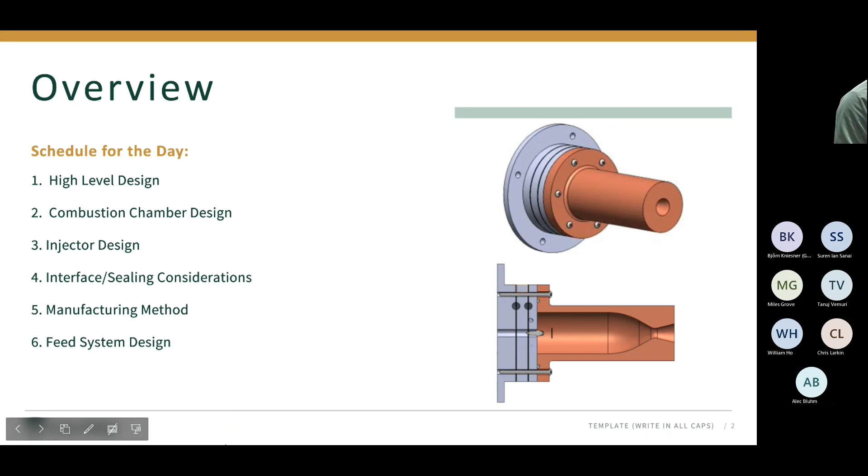All right, so here's just our schedule. We're going to go through some high-level design, then get into the combustion chamber, the injector, the interface between the two, some high-level manufacturing methods, and feed system design.

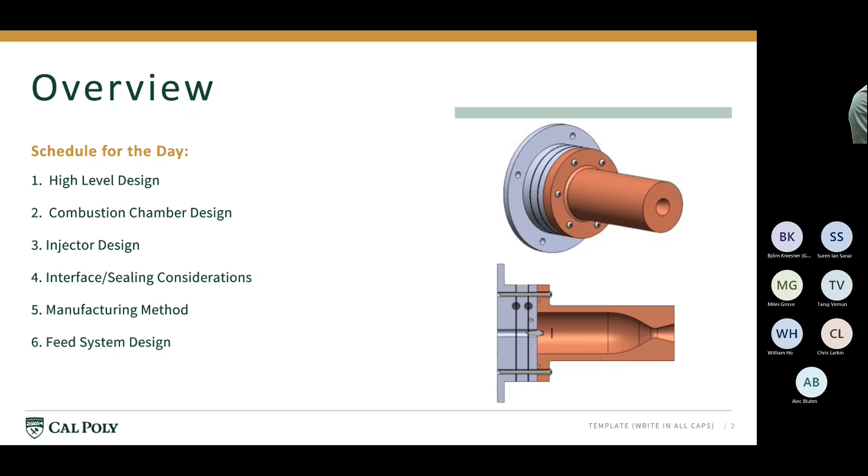And up there you can see just some pictures of what we have so far.

High-level design: we decided to do an ethanol and nitrous mixture, 90% ethanol, and we're able to dope that down if we have any more thermal problems. Mixture ratio of 1.5, thrust of 25 pounds, a chamber pressure of about 10 bar, no cooling method this time, and a pressure fed system. The goal is to be able to integrate with the test stand and to scale this project up. A lot of these constraints are from either the department or from conservative metrics that we've developed, so the goal is to make it bigger and flight ready as time progresses. A lot of these are very light goals.

The system—just to be on the same page, not a flight engine yet. No, definitely not a flight engine.

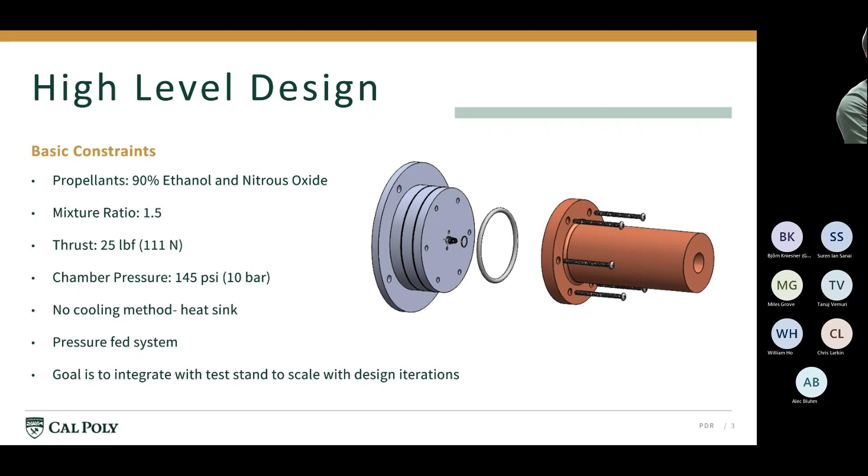This is getting a little bit more into the combustion chamber design. We first used CEA to calculate things like gamma, the combustion temperature, and the molar mass, shown here. Then we used RPA to size the combustion chamber. We went through our own calcs to make sure everything checked out, and it did match RPA's calculations. We'll get more into the specifics of the nozzle and combustion chamber in the next few slides, but this is our process.

We designed the nozzle for ideal expansion at sea level. Question: is the idea that this remains always just a test cell unit that you can scale up, or would you eventually want to fly something like this? I don't think we would want to fly the heat sink. At this point, no.

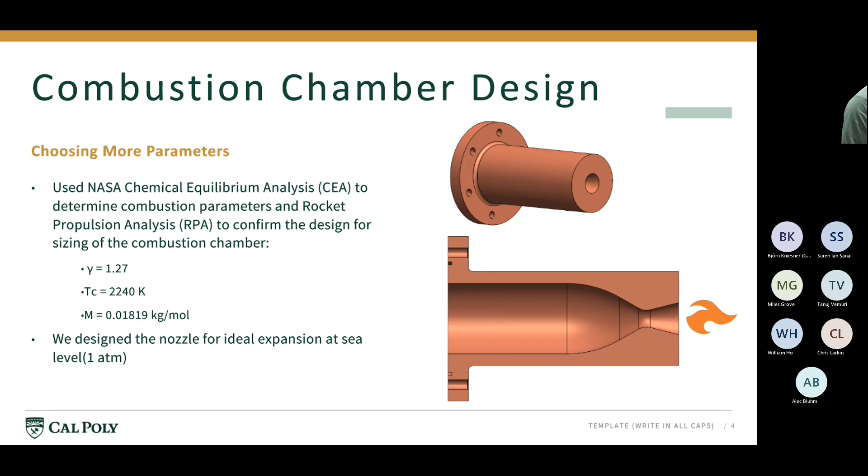All right, this is on the nozzle design. There are some rocket equations we used to get parameters here, like the exit velocity, the coefficient of thrust, and specific impulse. Not the best specific impulse, but again we're not going for perfect efficiency here—we're just going for something that doesn't get too hot.

Wait, I'm confused because your exit velocity and your ISP tell two different stories. Exit velocity being out of the nozzle, right? Yeah, not your C star. No, not the C star. Because your exhaust velocity should scale with ISP through G. But if I take 2124 and divide by 9.81, I get 216 seconds. Interesting.

Is the ISP from RPA? I don't think so, I've got my code right here. There was a little bit of crossover between RPA and my actual code, but I thought I ironed everything out—it might be. I would double check that number. Whoever's taking notes, take it as an action item to double check ISP, because 109 seconds seems really low for a liquid—you can get 70 seconds with cold gas thrusters. I would double check the ISP number, because if you're getting 2124 meters per second exit velocity, you should be getting like 200 seconds of ISP. Yeah, I'll double check it. Maybe it is more, I'll look into it. It should be an easy fix, but cool.

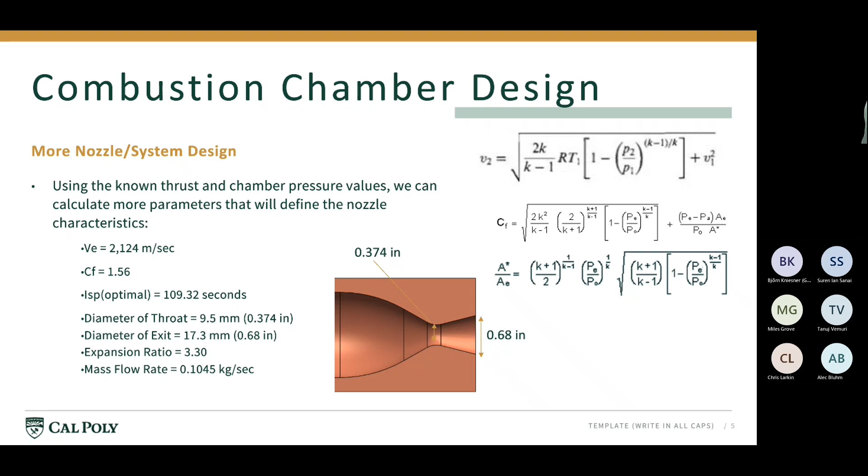And this was the chamber sizing stuff. The RPA sizing outputs—we were a little skeptical because the contraction ratio was so high, like 15 or 17 that it was first outputting. That's like 3 or 4 times what I was expecting.

But then going into Huzel and Huang, it showed a couple of graphs that essentially plotted experimental liquid propulsion systems. These aren't the same pressures we're experiencing, but if you look at the graphs, our throat diameter, around 0.37, shows contraction ratios that have been really high for successful systems. So we went through the sizing again and assumed that was okay, and then we chose the chamber length also based off of graphs like these in Huzel and Huang.

Can you talk a little about what contraction ratio is and why that number was originally suspicious for you? Contraction ratio, for those who don't know, is the area of the combustion chamber to the area of the throat.

I haven't sized something like this before, but when we were going through the calcs, I was expecting something between 3 to 5-ish, based off things I've heard of other people's engines. But because our throat diameter is so small, it made sense that RPA was outputting things we weren't expecting, and that the calcs I was doing were consistent with what we were finding across other thrusters of this size.

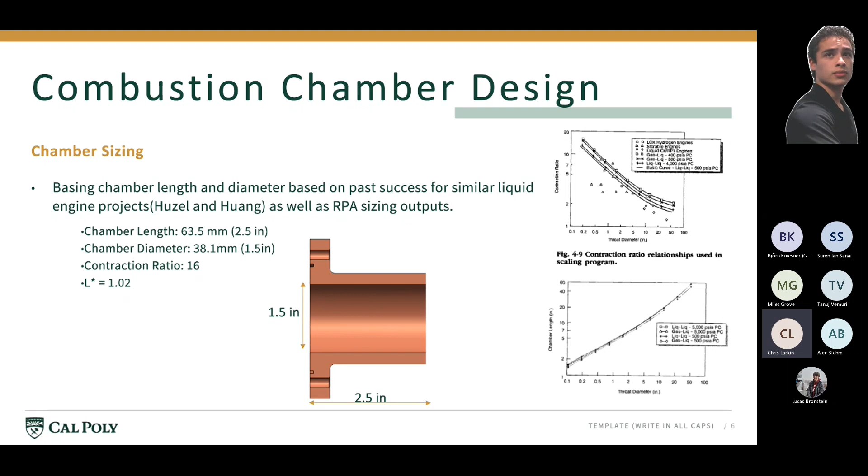And then did you guys look into how much heat you're actually going to be dumping into the chamber? Like I see thermal conductivity, but do we know how much heat it can take before it becomes a problem?

Yeah, so I'll refer that question to Adam here. Yeah, we did. Jake's about to get into that right now with the thickness of the material. So I think he's next.

Are you guys going to touch on how much heat's being dumped in at the throat specifically if you're going to use a copper chamber? Yeah, I don't think we go into the throat specifically right now. I think that's something that we need to look at for PDR or CDR. Yeah, but you'll probably melt the copper without any kind of cooling.

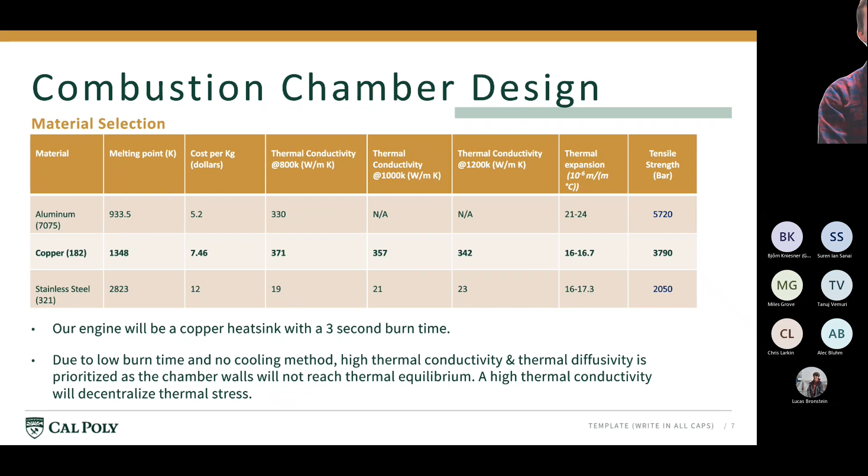Okay, hi everyone, I'm Jake. Where's the actual slides? Does the arrow just work? The one, the arrow on the keyboard.

Yeah, okay. Anyway, so in terms of analyzing the heat transfer, that was most of what we did for determining the wall thickness, because with our chamber pressure being as low as it is, our actual mechanical stresses in the chamber walls were far below the yield stress of the copper we were looking at. And so ultimately, because we're doing the heat sink method, we needed to know how much heat we could transfer in without losing the structural integrity of our combustion chamber.

In order to do that, it's kind of a complicated problem, but it was difficult to find heat transfer coefficients for the convection between the hot gases and the chamber walls. And since that's an overwhelming majority of how the heat is transferred into the walls, we had to figure that out. There was a method in the book by Huzel and Huang for estimating the convective heat transfer coefficient, which came out to be about 0.002 BTU per inch squared second degree Fahrenheit, which is a fun unit.

Anyway, using that, I calculated pretty much the worst case heat transfer across the entire thing, as if it were never really changing temperature and not dumping any heat, because our burn time is so low, and basically just did an estimate of how much copper volume we would need in order to withstand the heat, on a specific heat basis. Ultimately, this doesn't help us determine where the hot spots and things like that are, and that would be really difficult to do.

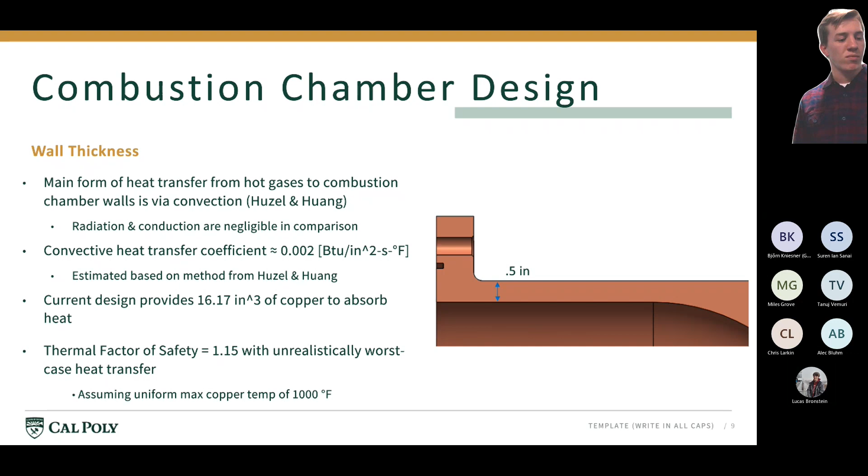Yeah, but going to the previous slide, I think you're sizing your wall thickness based on chamber pressure and some material strength, and then are you applying a factor of safety on that, or are you just assuming PR over T?

Oh, so based on the math we did, I use a factor of safety too, when I was doing a lot of the stuff later in the interface, which is really high. Okay, I'm sorry, did you hear that? Yeah, it sounds like you're using factor of safety too. Adam said he used factor of safety too for other stuff.

The reason I didn't include that on this is because the yield strength of the copper we were looking at was so much higher than this; it was a very loose estimate on what the mechanical stress is. This was based on just a thick wall — actually I think a thin wall cylinder, as a pressure vessel, which isn't perfect, but it gave us a ballpark estimate, and it's just so much lower than the yield stress of copper that it didn't bother us.

A quick note on this slide: you have the different strengths of things with respect to temperature and percentage of their initial strength, but I don't see the initial strength of copper noted. Oh, it's the brown line there, I didn't write it out. It was more for reference in terms of what the relationship looks like.

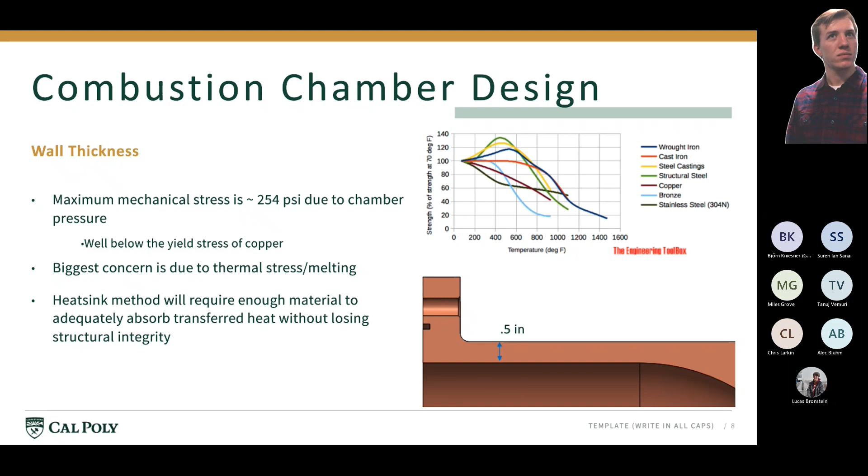I guess just to support what Alec said prior, if you're going to treat this as a lab unit, increase your wall thickness — it doesn't hurt you any. That way you can at least get more fires out of it. You never have to worry about, in the second fire, going back and reassessing your current wall thickness versus what it actually should be. It's just easier. Gotcha, okay.

All right, next we got injector design.

How do you move the slide forward? I just want to know. It's just the arrow keys.

Hello, I'm Aiden. I've been the leader of the injector team. The injector is the most complicated geometrical part of the rocket engine, so we've been working on the design for a while. There are high-level design decisions you need to make before you actually get into creating geometry, so we're going to go through those first.

The first thing you need to decide is your mixture ratio. The mixture ratio is the ratio of the mass flow rate of the oxidizer to the mass flow rate of fuel. For our engine, we're using a mixture ratio of 1.5. The reason we picked that relates to our use of the softwares RPA and NASA CEA.

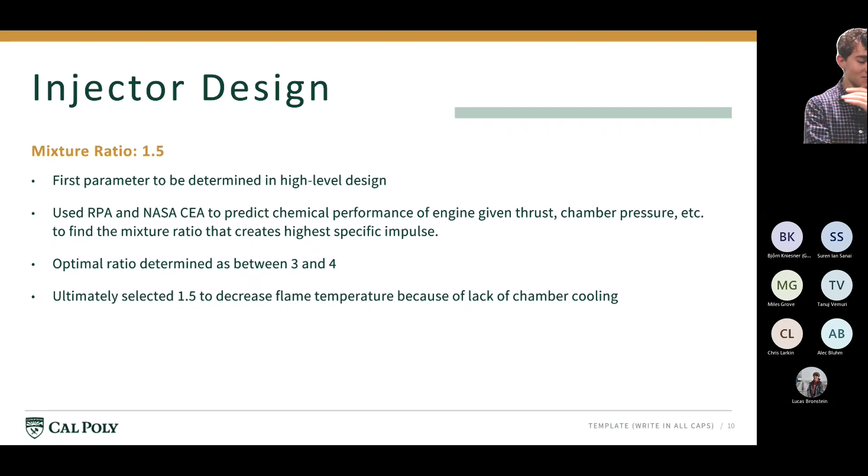I guess it's between 4 and 5, not 3 and 4. This might have been different. It's fine, for reference I'll just give it to you. Sorry, okay, I'll move on.

The big decision you have to go through regarding injector design is the element type. There are a lot of different ways to design an injector, and that main decision of injector type governs everything else.

The most common type of injector and the most well documented is the impinging jet injector, where you have channels through which your oxidizer and fuel will flow, and they exit the injector faceplate and hit each other. The two streams hit each other at an angle, creating atomization, which is best for combustion, so you'll be able to ignite easier.

This is a tried and true design that has been around since the very beginning of rocket engine design. Initial estimations of the injector orifice area indicated that with our hole size, we only needed one element, and that element would be placed in the center of the injector faceplate.

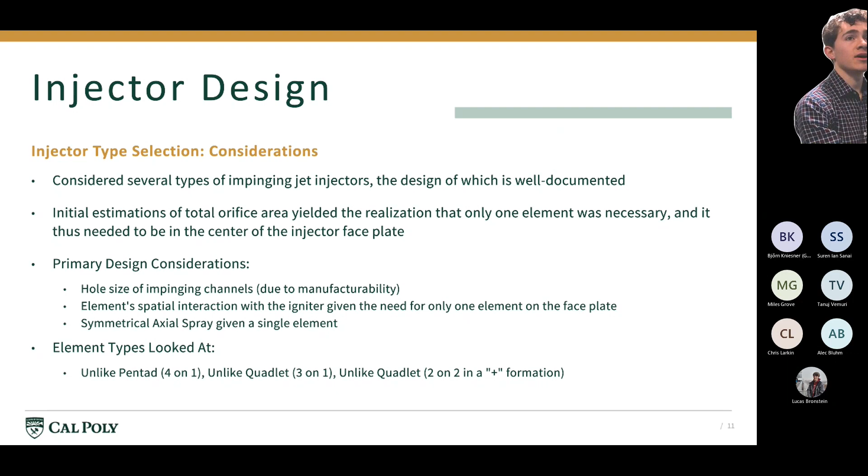So as for what we actually ended up picking, we picked the 2-on-2, the plus configuration. The main reason was igniter placement, because with that design, it allows us to place the igniter squarely in the center of the injector plate, with 4 holes surrounding the igniter hole where the propellant will exit. It's easier to integrate the igniter into the injector than into the combustion chamber, so we just decided to go with that route.

In addition, the hole size is different versus the 4-on-1 and the 3-on-1. The 2-on-2 increases the minimum hole size you need to drill, because with the 4-on-1 and 3-on-1, you'll have small holes on the outside and a larger hole in the center, but with the 2-on-2, they're more balanced.

Got it. And so for the final high-level design decisions, you have to decide on your areas for the orifices. You have to decide on the angle at which they're going to impinge, and you have to decide on the distance that the propellant will travel before it hits the impingement point. So impingement distance is like a straight line distance.

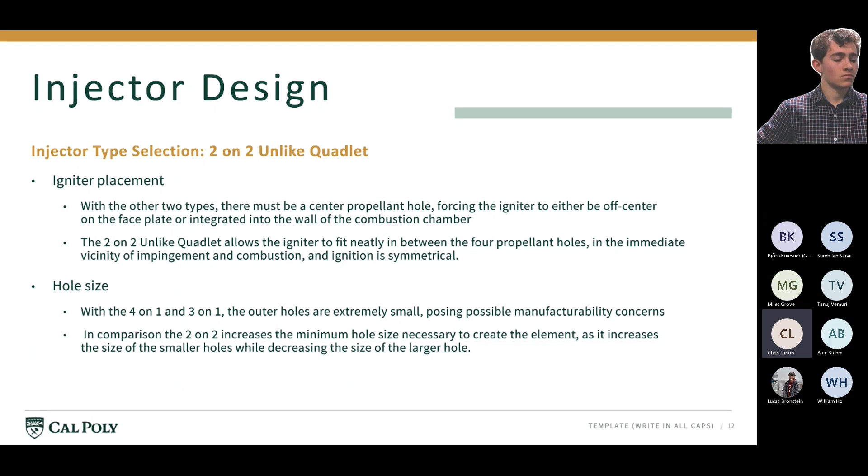You mentioned this in the previous slide — wait, sorry, can you go back one? Yeah. All right, never mind — if you're going with the 2-on-2 plus, my point's irrelevant. Disregard. Okay.

Over to Alex. We selected stainless steel for our material. Nitrous has corrosive properties, so we didn't want to corrode our injector. It also has a similar thermal expansion rate to copper, and it's also cheaper than copper. The main disadvantage to stainless steel is that it's pretty hard to manufacture.

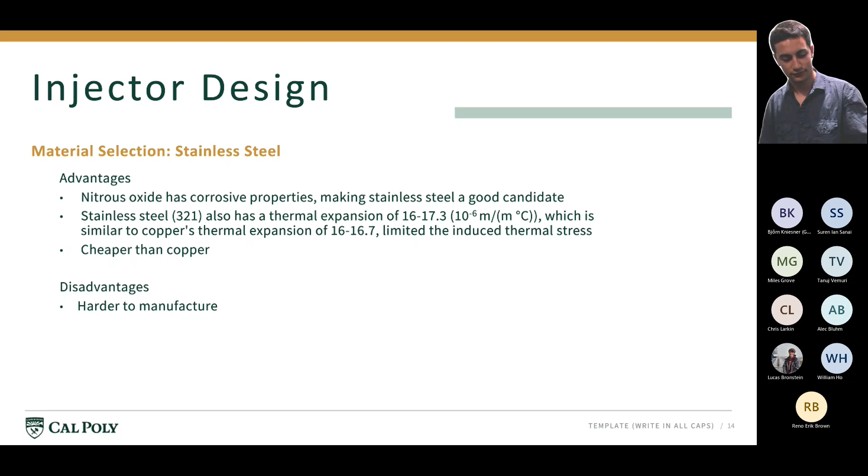So with impinging injectors, a very tried and true design method is the stacked plate approach. Essentially this means you need to route your propellant from one inlet to potentially multiple outlets, and therefore you need to distribute each propellant through a manifold. One of the easiest ways to create that manifold is by using separate plates, where each plate has half of the channel manufactured, and then two plates with mirrored channels are put together to form a full channel that the propellant can travel through.

So this comes to the big crux of where we are right now. We, as the injector team, do not have a single injector design selected. However, we have several candidates, and we have two specific trades that we are in the process of making, and we'd like your advice as to which would be best to proceed with. The two trades are: using 2 plates versus 3 plates to create the injector, and the way in which the propellant will enter the injector from the feed system. I'll get into that.

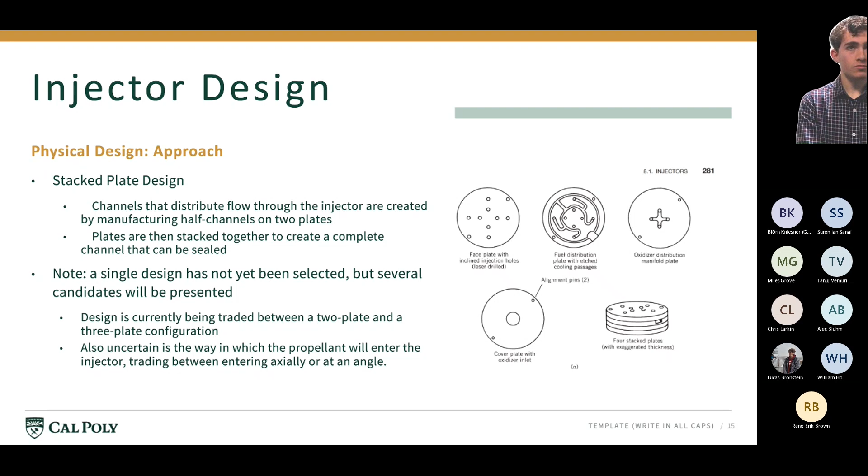All right, so I was talking about the trades that we were going to make, and I'm going to explain one of them. The other will be explained within the actual designs that we show. We're going to show two designs. One design we're sort of leaning towards, and that's the design in the assembly you've already seen with the actual combustion chamber. But for right now, we're considering two options.

What material is the gasket? Graphite. Wait, this is like, it's not pure graphite, right? It's like a graphite mesh thing. I feel like you guys have used this previously. Yes, I'm not exactly sure what the exact material is, but I know the gasket material used in the prop lab is graphite, so that's mostly what we were basing this off of.

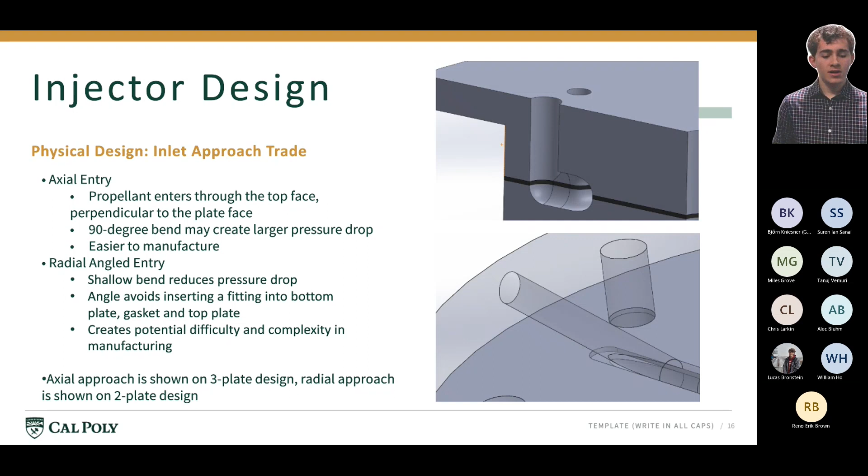Yeah, I think that was all I wanted to talk about here. So I will hand it off to Alex, and we will talk about the 2 plate design. Okay, this is our 2 plate design.

I'm just going to move on to the advantages and disadvantages. If you guys have questions, we can go back to the images. The strengths of this design, theoretically, is reliability. There's only one gasket instead of multiple, and there's fewer parts in general.

The main disadvantages of this design are small wall thicknesses, and we can go back to the images to look at those - they are unavoidable, unfortunately. The geometry necessitates a channel being routed between the igniter hole and the orifice holes, which makes things complicated. We have to use small channels; in the 2 plate we're using 1/8 inch channels, and that brings up problems with the feed system.

It's hard to implement with our current feed system because we have an area restriction from the 1/4 inch pipes in the feed system, which leads to a pressure drop, and that makes things hard to predict.

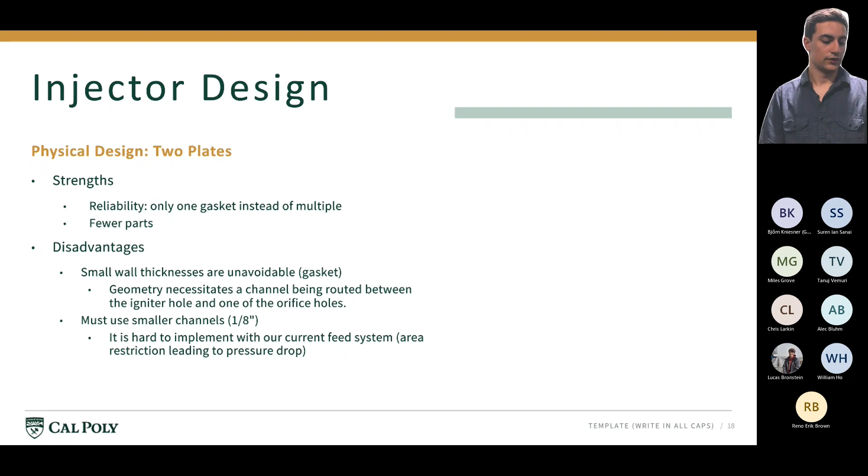Yeah, go back. It's hard to see, but if you look at the transparent view, slightly to the right of the igniter hole, right past one of the orifice holes, there's a channel moving very close to that hole. That distance is very, very small, dangerously small. And there's another one right to the left of the igniter hole as well.

So right here, and then yes, you can see that right here and right here. Although we can change this - it can get larger. That's the main problem with this.

You do have a small wall thickness there, but during operation your pressure differential across that should be fairly small, assuming similar pressure between the ox and fuel side. Right, you have a small wall thickness, but you'll have high manifold pressure on both ox and fuel side that cancel each other out, where your net stress is essentially putting it into compression.

Yeah, but they're still going to feel that high differential during fill though. Right, it's during your startup transient, I think, where you would maybe get bit - when they only have nitrous in the system and they're still putting fuel in, or vice versa.

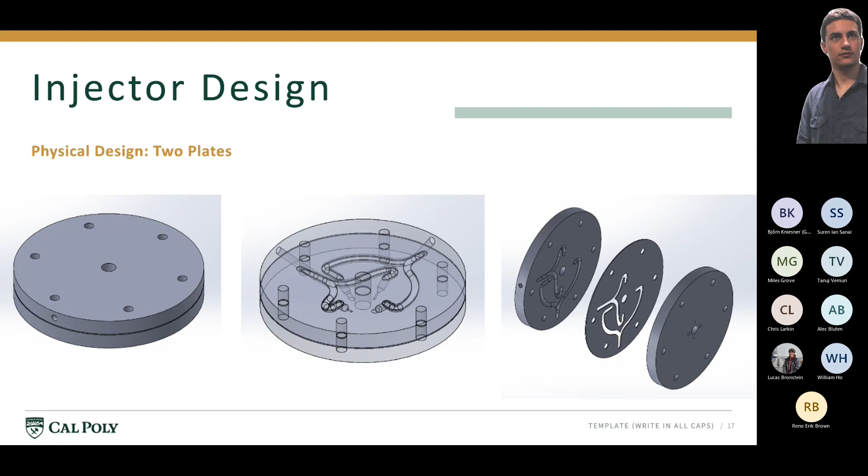So we're going to move on to the 3-plate design. Why is it not working? I thought it was just the arrow key. I'm just clicking that. Okay, whatever.

All right, and then the second design that we were considering was a 3-plate design. It's a little bit hard to see what's going on in the picture, but essentially the channels for the oxidizer are sandwiched between the top 2 plates, and the channels for the fuel are sandwiched between the bottom 2 plates. We can head back to this slide if you guys have any questions.

The main strengths of the 3-plate design are that it allows for larger channels, a quarter inch in diameter, because the channels are spread across 2 different planes instead of just one. This also allows for greater wall thicknesses. A disadvantage is that it requires 2 gaskets, which is theoretically more points of failure. And also, manufacturability is harder.

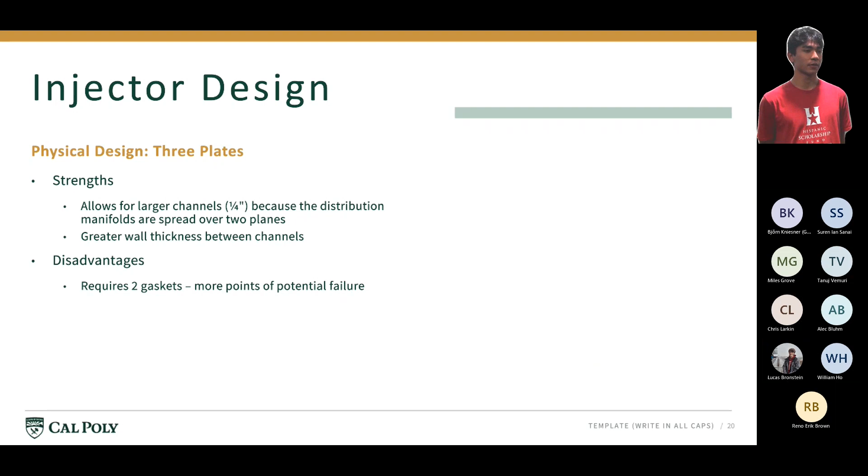Can you go back to the previous one? I think one benefit as well is that it makes it so you don't have the same crossing manifolds, right? Yeah, like for the single or the 2-plate design, you have to weave both oxidizer and fuel in between each other, like Miles was talking about. Whereas if you go to the 3-plate design, you don't have that, because they're on separate levels. Yeah, exactly, you should just be able to go straight line with that. Then you don't need to do the pairing like you guys have.

I don't know how I'm going to be able to say this effectively. For the middle plate and the middle-to-combustion-side gasket, you have the injector hole through the middle, and then you have 2 holes on either side. What are those for? Those holes are for the other propellant. The other propellant is traveling through those holes after having been routed in the first gasket. Oh, just kidding. Yeah, I'm silly. Sorry.

Copy. And then it's just a supply hole for the opposite gasket on the top left hand side. That's just a supply hole for the bottom. Exactly, yes. So the oxidizer is routed down to the first 2 plates, and then it's split off and routed down to the orifice holes, and then the fuel is routed down to the second 2 plates and split off there.

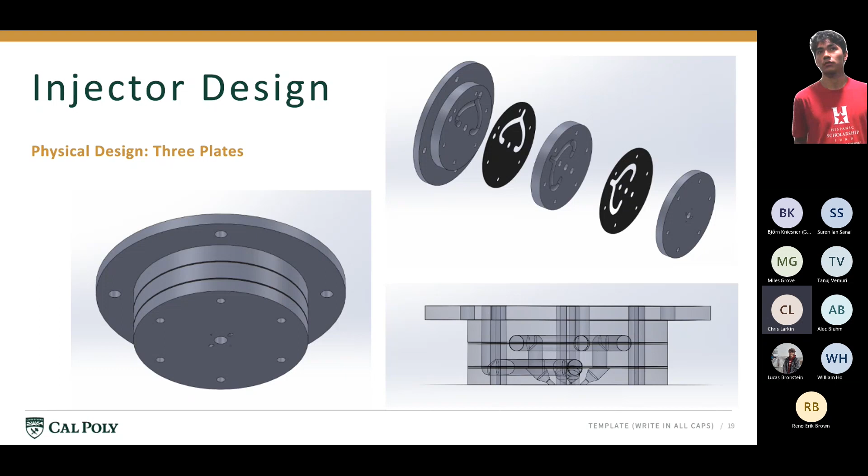Right, but are those not through holes all the way through all 5 parts there? Or do you have a blind hole in the top? Oh yeah, so the CAD has through holes, but Adam did his calculations based on a tap joint. So we're probably going to change the CAD so the bolts will tap out and end within the top plate.

Copy. Regardless of calculations for the joint, I think that would be a win in terms of making sure you don't leak and blow a bunch of fire back at your feed system as well. That makes sense, yeah, it's just something I forgot to change in the CAD.

Wait, I don't really understand that. Why do you want to put threads into the stainless steel instead of just putting a nut on the back face? If you have a through hole through this stack, Miles, you'll have a leak path from the combustion chamber to the head end.

Are all the bolts external? Yeah, all these bolts are external. But even though they're external holes, there's still a path through the gasket. Oh, I see. The thing is you could still get fire playing directly back in your feed system if the gasket bursts.

Gotcha. Because there is an O-ring in between, on the bottom face of the bottom plate, there is an O-ring between the combustion chamber and the 6 holes, just inside the combustion chamber flange. Well, we have a whole interface slide later, and we will address that.

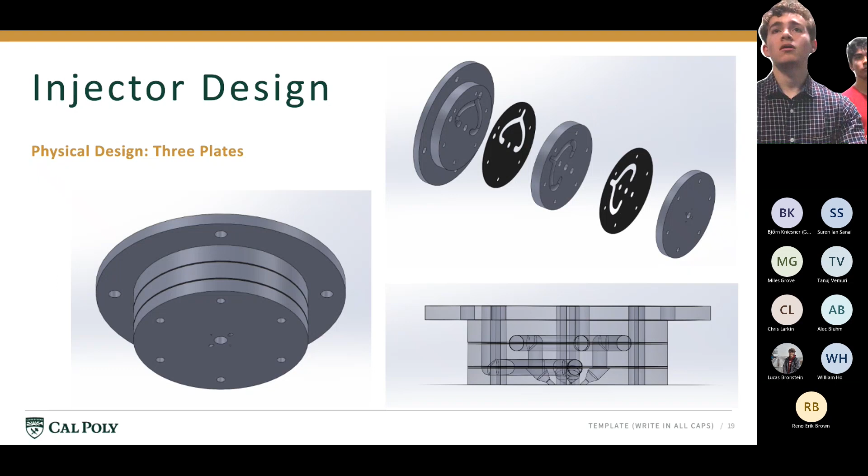Yep, okay, I think we can move on now, and we will talk about the igniter.

Wait, sorry, I think one of the things you guys were trying to take away from the PDR was getting advice on 2 or 3 plate, right? Yeah, that I did. I don't know that we really settled on either. I think we've given them a lot to think about.

Well, we settled one trade, which was the entry, and just for ease of manufacturability, we'll do the axial entry. Yeah, I think that's applicable to both, right? Yes, that is applicable to both.

But yeah, what are your gut feelings about 2-plate or 3-plate? I don't know, man, I feel like if you guys can figure out a way to make 2-plate safe, it's probably easier. Yeah, from the manufacturing standpoint, 2 plates is just superior because you have so much less concern about alignment.

So are you guys gonna go over this later? Maybe you will. But who is gonna make this and where? It's a great point, we have a little bit about that later.

Okay, and then one last note on the 2-plate design: I think the only thing you'd really have to worry about is your minimum material condition for manufacturing. If you get too thin, you're going to experience some super thin walls, so make sure to take that into account and double check it when you're actually manufacturing if you go down that route.

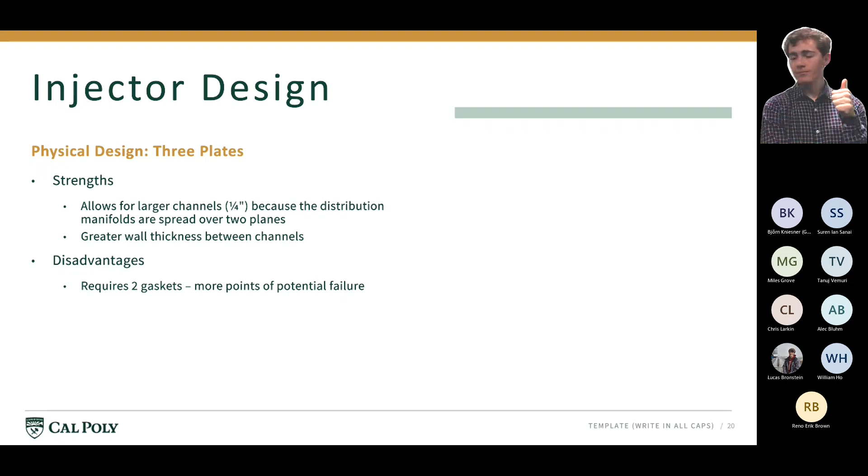Okay, so when we were talking about igniters, we went through 4 main choices: a spark plug, a nichrome sparkler, a hydrogen burn-off igniter, and a piezoelectric lighter. We ended up settling on the spark plug as the best option, mostly because of its size. We found the smallest one to be about 0.23 inches, and like they talked about earlier, it has to fit in between the orifices, so that was honestly the main deciding factor.

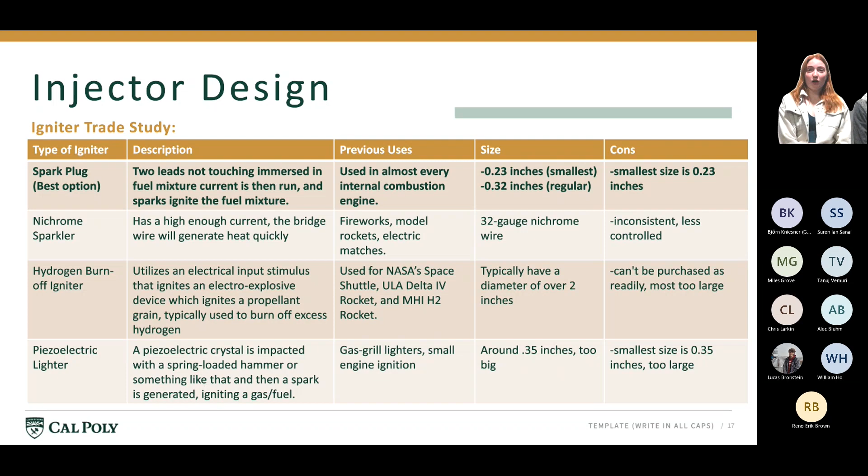The nichrome sparkler we didn't go with because it's inconsistent and less controlled compared to the spark plug, although it would have fit as well. With the hydrogen burn-off igniter, they typically have diameters of over 2 inches, so that just would not have worked with our design. Same thing with the piezoelectric lighter - it was about 0.35 inches, so also too big.

Wait, sorry, can you go back one? For the hydrogen burn-off igniter, I think that's for burning off the excess hydrogen, during the startup sequence, right? It's not used for actually lighting the engine - that was more of an example. Like SSME and RS-25 use an augmented spark igniter, so I guess that's more industry use for the thing that you guys are leaning towards.

But did you guys look at augmented spark igniters? So instead of just using a spark plug, you have flow specifically for your igniter, so that you create a little torch essentially. I've looked at augmented igniters, yeah, I looked into that a little bit - they seem pretty hard to build.

Yeah, so I don't disagree with that. The problem is if you run just a spark plug instead of an ASI, I don't think you guys are going to be able to reliably spark without hard starting. Because you need flow onto your spark gap in order to reliably ignite, right? During your startup transient, if you just dump fuel and ox into your manifolds, you have to wait for them to go back up to your spark, and then it'll light - but at that point you've already dumped a bunch of prop into your combustion chamber, and so you create a bomb.

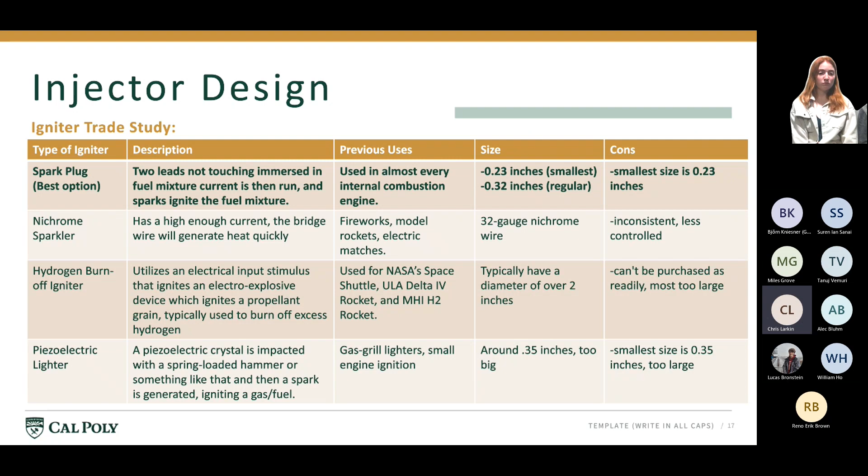So if we do use a spark plug, we found rimfire spark plugs, which are available for purchase, and they fit between our 4 propellant orifices. The pressure and temperature ratings have been verified through our existing Cal Poly bi-prop lab, which does use spark plugs. That says 6 millimeters, but that's roughly 0.23 inches and will fit in our design.

I would talk to Cody about his experience using that spark plug because I think he hates it. In my memory, he hates it. Yeah, those spark plugs for the one in lab also have to be modified to arc to the wall, if I remember correctly, so Cody has to go in and cut the tab off. Yeah, that sounds about right, and I think that's part of the reason he hates it.

Sorry, just one comment on the design process here: this should not be the interface between the injector and the chamber handled like this. You guys are two separate groups working with each other. This should not be the injector team passing you a hard requirement and then you guys having to abide by it. If you guys can get a significantly better spark plug that requires moving injector holes, that's something that should be in the trade space. Maybe you don't end up going with that, but it's not something where they should just say 'I 100% need this' and have it taken as gospel truth. There should be a back and forth between y'all. You are both equally contributing members to the team, so it shouldn't just be one team passing requirements one way without consideration for their downstream effects.

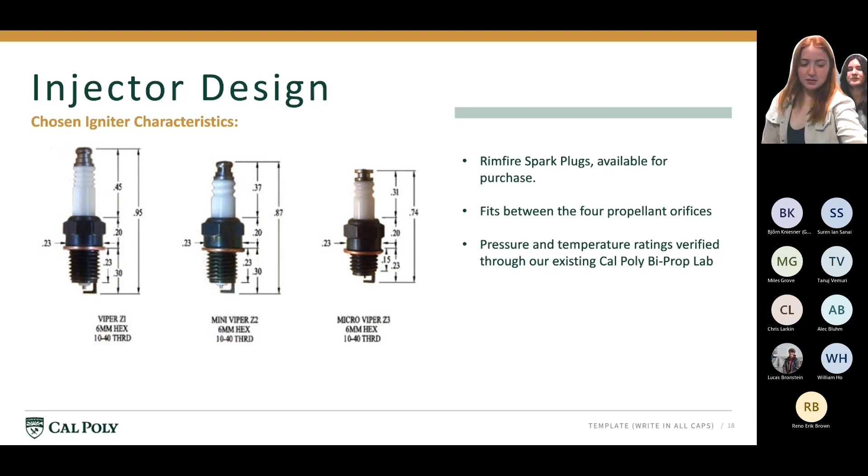Okay, sorry, one last thing. How would you be sparking the spark plugs? You need a high voltage source that's oscillating at some frequency typically. One thing that I've done is buy power supplies for neon signs or whatever and hook that up. But something to keep in mind is that you can't just throw a spark plug in there, you do need to apply a voltage across it. So that's something to consider for CDR, especially if you're going to be using that for timing critical things in the ignition sequence, you need to have that hooked up to your control scheme.

Okay, yeah, our test team might have something on that. Nope, okay, maybe they don't. My thought was we could get a coil and a battery, and I'm not entirely sure if we can get it to spark with that setup, but we could probably come up with something that would allow it to actually spark or just a continuous arc. Yeah, the problem is you need to really oscillate, typically you can't just apply voltage and hold it there. So looking into neon sign power supplies might behoove you. Yeah, write that down, neon sign.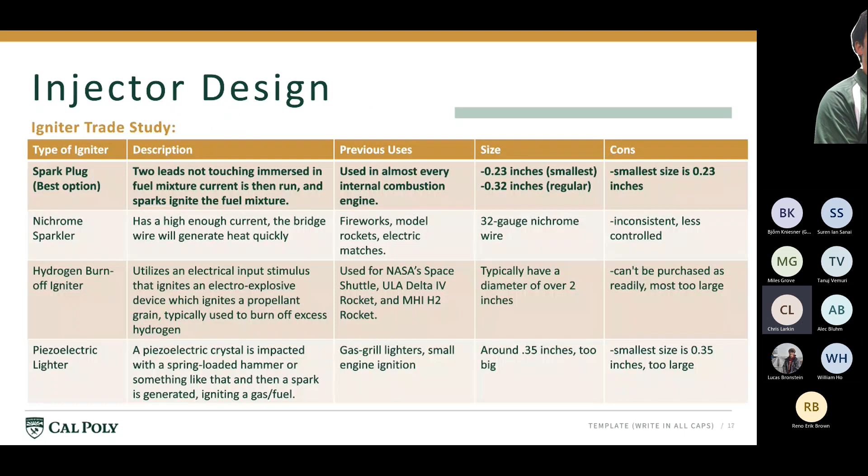Sorry, can we go back a couple slides to the injector design, and you can show me where the copper is? I thought this was stainless, I think I misunderstood something. There, oh perfect, gotcha. Isn't that... oh, you're saying we're flipping it and threading from the injector face up now? Yeah, that's what we were.

Hey, by the way, 6-32s are one of the worst screws to use for thread strength, because they have a really poor shear area compared to the thread engagement, just because of the depth. So I would upsize or even downsize and increase the number of bolts if you can. Okay, yeah. And then I'll... what were the—what's up, go ahead.

I was just saying that the joint analysis I did in Shigley's assumed the bolts were coming from the top of the flange, which is the tapped joint on the combustion chamber itself. I'd assume you can flip them, so they don't have to come from there. That's harder to manufacture, I guess.

Yeah, if you end up just buying 3.5-inch stock and don't machine it at all, you're gonna need to install from the other side, right? Like from bottom to top in this picture here. Yeah, and then you just have a blind hole that's tapped.

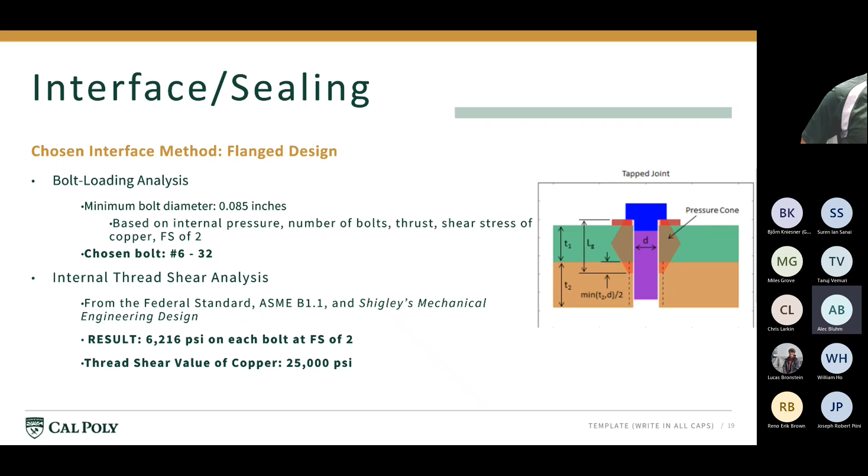Go forward one slide real quick. Those look like flathead screws. I'd use a bolt. Yeah, those are pretty... like an Allen wrench head. Hex head, yeah.

I was gonna ask what material your bolts are. I think we're just gonna do stainless. I was only worried about the shear of that copper, and stainless is a lot stronger, so I didn't even really look. I assume the bolts were stronger in shear, but I think that's...

And how are you guys sizing that O-ring? Sorry, I missed that, how are you sizing the O-ring? We have O-ring sizing using Parker. We use Parker but we haven't picked the exact O-ring yet. Okay, we're just gonna use the Parker handbook.

Cool, I would just say to probably use A286 bolts for this. Okay, A286, oh okay. And going back to Miles's point, maybe you just end up using quarter-20s or something like that, or 10-32s. I think the proper way to design this is to try and get a stress value super close to yield and ultimate with your factor of safety applied, but realistically you can just slap some quarter-20s on there, have a huge margin of safety, and roll from there. Yeah, that makes sense too.

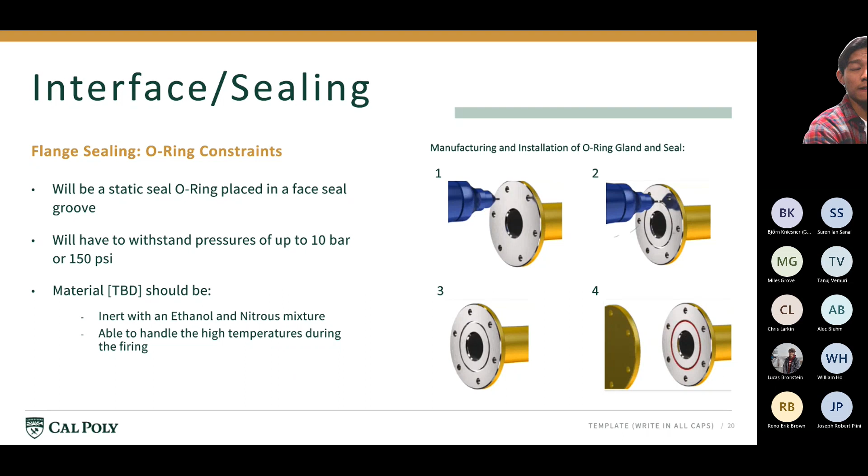Any questions or any suggestions? Just to clarify, so this is an additional seal from the combustion chamber, in between the injector and the combustion chamber? Yeah. Can we go back one? Go back one, yeah please. That's very well. Gotcha, okay.

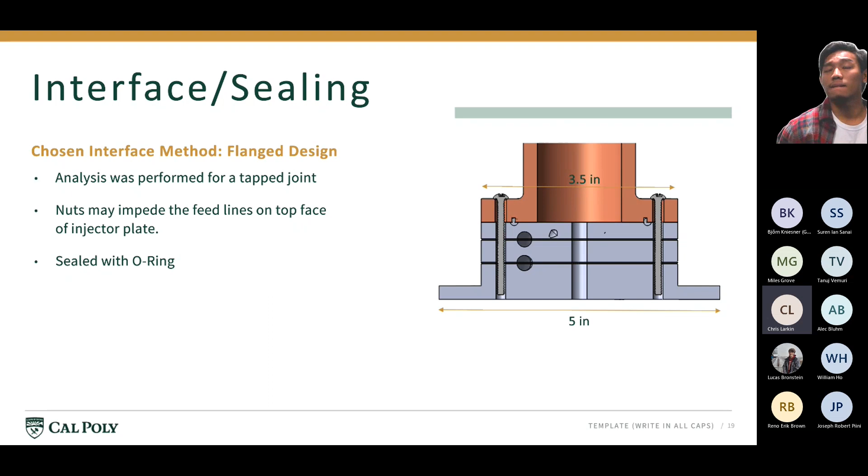I just think what everyone could do instead - if we go to the next slide - I don't think we need to do an elastomer O-ring. I think you could probably get away with doing a copper seal here and then just using your joint preload to compress it, and then you don't have material compatibility concerns. And then you also have decent performance at high temperatures.

Also, you mentioned turning it on the lathe, but I think that's showing milling it. One thing - if you do mill it, and for lathes as well, typically you want to polish it after the fact just to make sure you have good performance, because you'll have machining marks on your sealing faces, these 1 thou deep grooves going from where the chamber is out, in the radial direction, and that can allow leak paths past your seal. So typically you want to try and have some polishing on that surface to help lay those down.

I think an elastomer would solve those problems though, wouldn't it, Chris? Yeah, but then you have to deal with material compatibility and temperature concerns. And the copper, depending on your joint preload, it will smush in a decent amount. Also it's probably sufficient, especially considering the low DP across it. But I want to instill some good behavior for industry. I mean, elastomer O-rings are relatively cheap - you could just replace them between every fire if you really needed to.

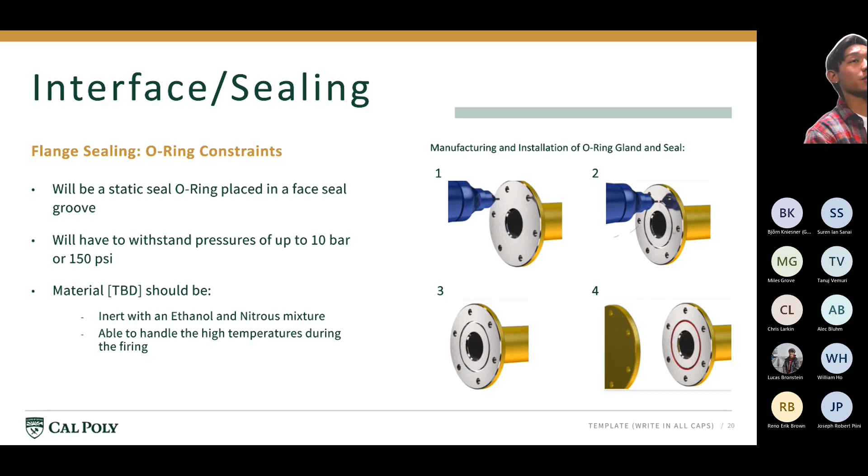Okay, speaking of choosing elastomer or copper, I chose to do my study on elastomer seals. The reason I chose an elastomer seal was because Parker O-ring gave a whole graph on choosing elastomer seals specifically. I was also looking at studies from Sandia National Laboratory, and they used exactly this ethanol and nitrous mixture, and they used fluorocarbon elastomer, and they said that was working pretty well for them. So that's why I continued through and used the Parker O-ring handbook for elastomer O-rings.

So we had an inner diameter groove, and we decided on 2.234 for O-ring number 228. Furthermore, on the actual seal dimensions, we found that for the numbers between 201 and 284, the cross section is about an eighth nominal of an inch, and the compression ratio ends up being around 20 to 30%. From University of Akron, they said they used around 20.8 for their static seal in a face seal groove, so I thought it kind of matched up.

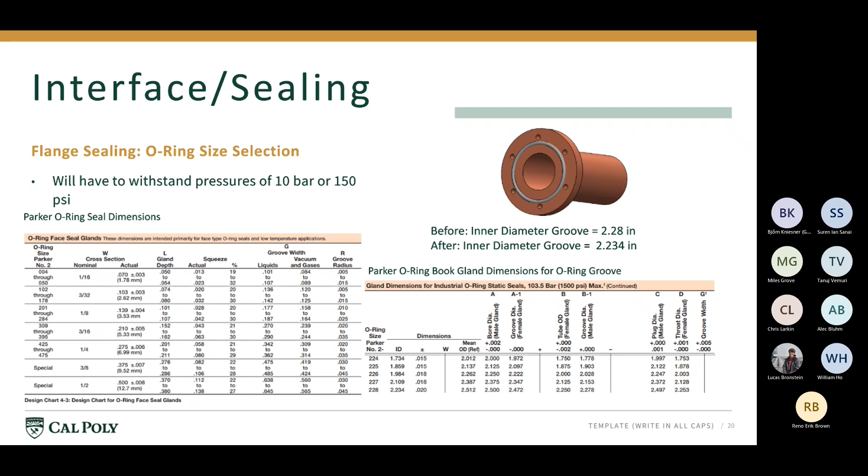All right, let's keep going. This is, sorry Miles, this is our very wimpy looking manufacturing method slide. It's not even the right lab, dude. I don't know how we did that.

For the combustion chamber specifically, we're going to turn to get the outer contour, but now that you guys are saying that, we should just make it really, really thick and not care about it as much, maybe just for material, for manufacturing efficiency, we don't do that. But then I bore out the chamber hole and then just use a manual mill to face the holes on the outside for the flange. And then we're trying to talk to CNC lathe operators to match the nozzle contour within the chamber, because we don't want to deform the copper since it's so soft, fixing it too hard. So very bare bones right now in terms of manufacturing method, we need to flush this out, so any suggestions would be greatly appreciated.

Thicker material will also crush your copper less, so it'll help with your contouring. Yeah, Ryan, do you have your blue tag? Trying to get it hopefully by the end of this quarter. So not fast enough. Yeah, he's trying to get it right now.

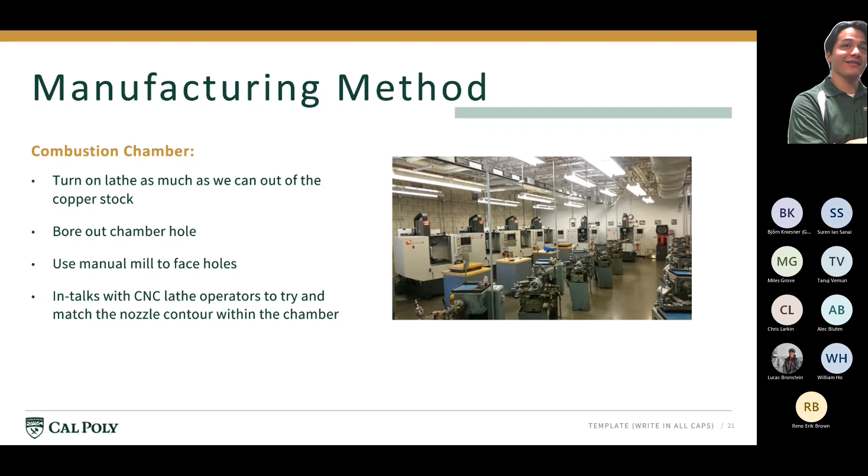All the injector plates can be made on a 3-axis mill, but making stuff on a 5-axis would be a lot better. For the 3-axis, we'd have to make a fixture to do those 45-degree holes. We were going to use a ball end mill for all those channels, but if we change to a flat rectangular channel, we'll just use a flat mill plus various twist drills, and a 60-degree chamfer mill for the area restrictions and actual orifice holes. Twist drills will also cut the bolt holes, the igniter hole, and the feed holes. The gasket we were thinking would be cut via laser cutter, but we weren't completely sure about that.

If it's copper, I don't know if it'll cut on a laser, especially a CO2 laser. Could be wrong, but double check that. No, I'm pretty sure that's right, I think it just reflects the beam back. I think you'd go with a water jet at that point and then polish it after to make sure you don't have a ton of garnet stuck on it.

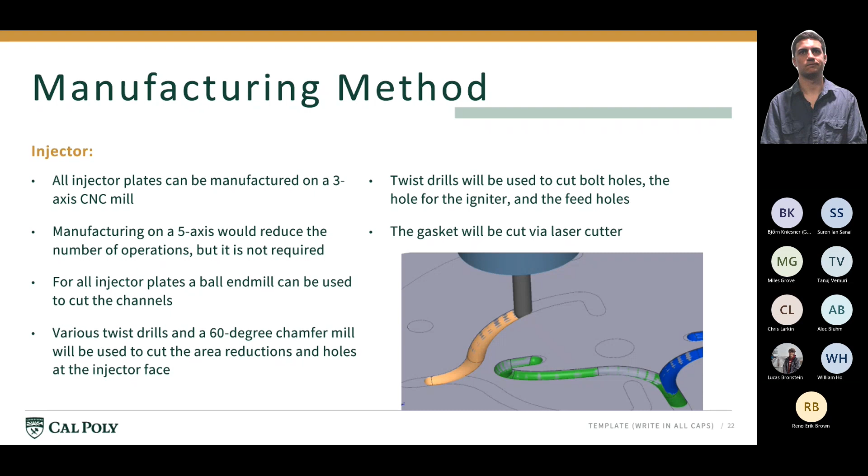But the basic idea is that, as discussed earlier, the nitrous will be self-pressurizing, and the fuel, the ethanol, will be run off of a nitrogen pressurization system. That will all then be feeding through Venturis so we can measure the flow rate, and then feeding into the injector.

A lot of the decisions made here, a lot of the components were made with safety considerations in mind. Convincing the school that we can do this safely is kind of the biggest impactor here. So each of the tanks will be outfitted with overpressurization devices, so dump valves, pressure safety valves, and burst discs, to prevent any overpressurization in the feed system itself.

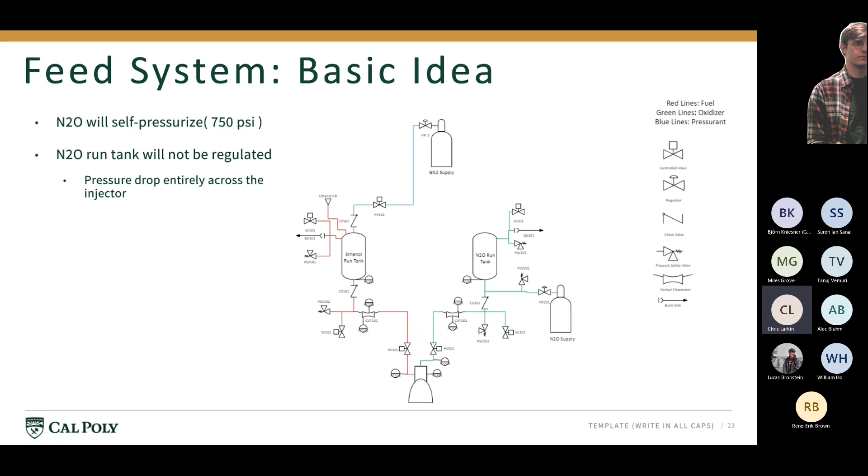Personally, I don't know if you have the juice, you can back some stuff out. Yeah, it might be good to have temperature, just something to look into. Not saying you 100% need it. Yeah, especially with instrumentation, it shouldn't be too difficult to add more thermocouples. It's just a matter of if we have too many inputs than our DAQ can handle. So that's the main trade for that, especially with thermocouples because they're fairly cheap and pretty easy to make. Thermocouples are kind of a lesser concern just because they're theoretically easier to add on at the end. If you're doing an inflow measurement, it'll take more planning. Yeah, but either a thermocouple or an RTD.

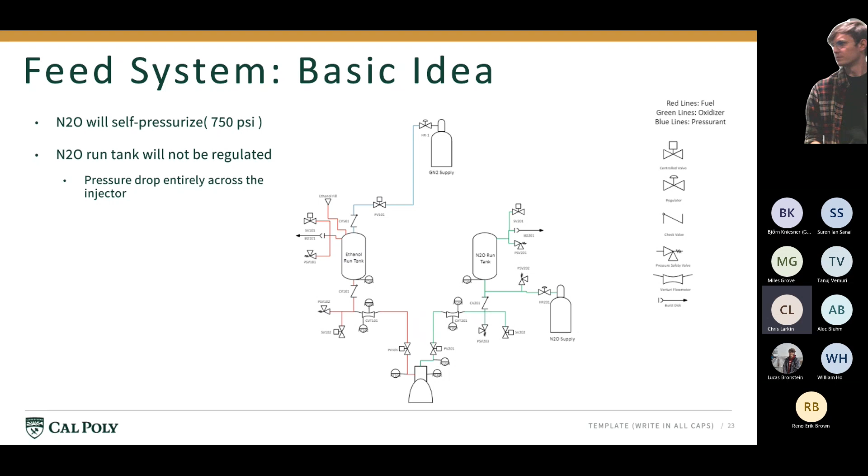Okay, I think I'm good to move to the next one. And kicking it back to Adam.

Okay, so these are just planning ahead goals. Before I get into those, I wanted to touch on a few things. What was it? Oh, okay, yeah.

Chris, on the ISP thing, you were totally right. I think it is 216 seconds. I had that in my code. I think I switched out the RPA value at some point and never updated it. But RPA was not assuming the combustion correctly. So thanks for catching that.

What else? Oh yeah, all right.

I wanted to talk about the self-press system. We were talking with Alex, a former CPSS member, and one of the reasons we decided to do a self-press system was because we originally had nitrogen pressurization, but we switched because we're regulated, we would have to regulate down so far. 10 bar is way under the vaporization pressure of our nitrous. We didn't know if it was going to be two-phase flow through the feed system, and that's something he warned us against doing because we weren't 100% sure of the phase, and corrosion because of that.

So, sorry, who was this?

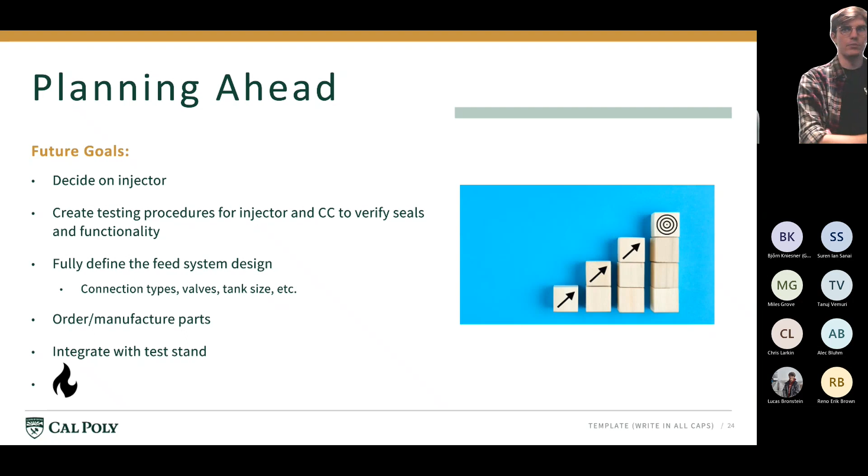We're probably going to take a break in between. I think we could take a 10-minute break. After this, ground support is going over the test stand, which should hopefully be much quicker. So we'll take a quick 10-minute break while we get that going, and it looks like we'll start up around 11:50 for the test stand design, because that's the other half of this - we're trying to make a new test stand that we can use for our further liquid engines.

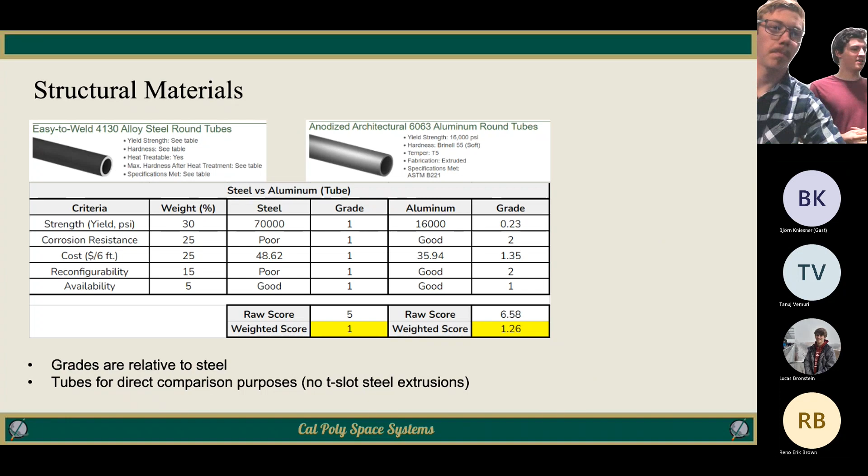We've been talking about adding off-axis force measurements as well, but our main priority is the main thrust measurement. We also want to be delivering pressure data from the feed system and run tanks, and potentially from the chamber of the engine. We also want to be delivering temperature data, so we can give the props teams all the data they might need to verify their calculations and see how well our engine was built.

So first we're going to be talking about the materials of our test stand, and I'm going to hand it over to Will, who's going to talk about that. Yeah, I'm Will. I did a lot of the structures with Ryan.

For the structural materials, the two biggest materials we practically considered are steel and aluminum. You can see a trade study matrix we did pretty early here. The matrix has 6063, but we played around with switching to 6105, which about doubles the strength of aluminum and doubles the price as well. The grades here are relative to steel, so steel is all 1, and then the grades for aluminum are either subjective for corrosion resistance and reconfigurability, or just a percentage of the steel value.

And the reconfigurability rationale there is not that the tubes are more reconfigurable, but for aluminum you can get T-slot extrusions, which would let us build a test stand, and then if we want to upgrade it to say 1,200 pound force capacity in the future, we can just add more beams and take out the brackets and reconfigure it like that.

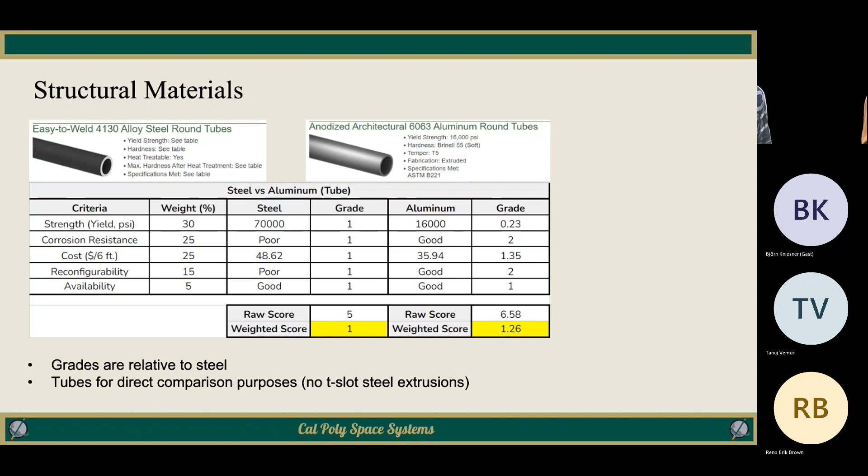What we ended up deciding is that we wanted to go with T-slot aluminum because, for one, it's strong enough. We did some preliminary FEA and found that we can get it within reasonable strength, so we didn't need to go to steel. And it's a lot more corrosion resistant than steel, so we didn't have to deal with meticulously painting every part, because this is probably going to end up being stored outside.

For our CAD, we did 80/20 40 millimeter T-slot. That was mainly for design purposes. We're probably going to end up reaching out to a few different companies and try to get that donated, and we might have to go back and revise our CAD depending on which T-slot vendor is willing to donate to us, if any. That 40 millimeters is really close to 1.5 inches, so we could do a fairly easy switch over if we got supply from an American company using that sort of extrusion rather than the 40 millimeter. It should be pretty universal, so we have some flexibility there for multiple different vendors.

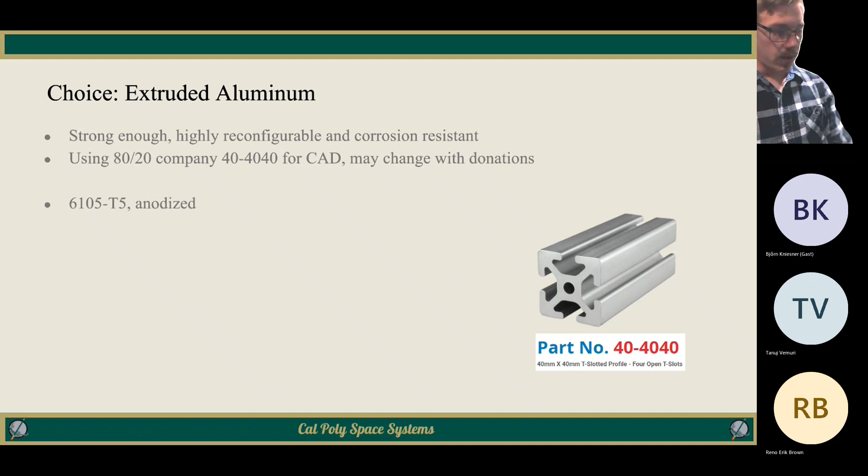Okay, I'm going to go into the initial design that we actually came up with. So we selected to do a vertical design, a vertical test stand, and that was both looking at heritage from existing test stands from other schools and the test stand that we have here at the college already. That was also partly due to a conversation with Dr. DeTuris, in which she mentioned to me that with a vertical test stand, we don't have to worry nearly as much about pooling of our propellants at any point through any of the testing or firing. We should have all of it flow out regardless of whether it has any failures or issues like that. We won't have an explosion waiting to happen just because of the orientation.

So we chose to do 4 supports rather than 2. The test stand in the prop slab only has 2 vertical support beams, but we selected 4, which gives us a little bit more support for off-axis forces. Let's say we take the stand into the future and we have bigger rocket engines on them, we may end up with some weirder off-axis forces, or overall a lot of thrust. We want to be able to control that sufficiently.

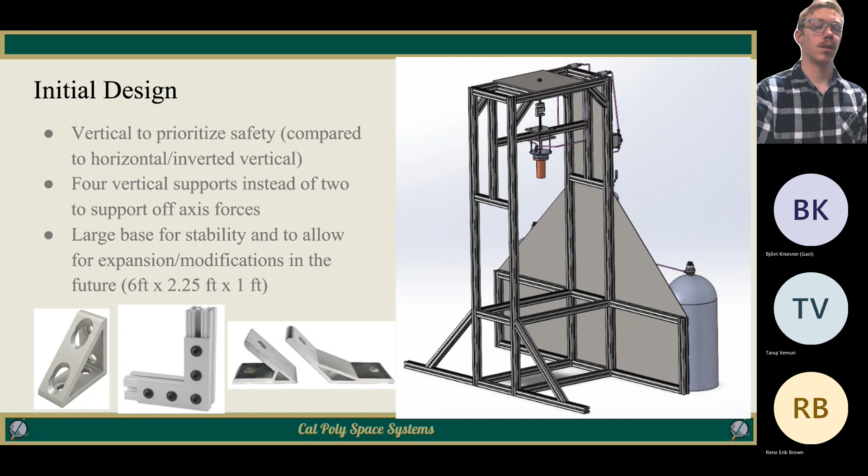And then we have either bolts or some sort of rod that will go through these two plates and then into the topmost plate of the injector. That's going to be the main mechanical interface between the rocket engine and the test stand itself. In theory, that should distribute the load generated by the engine into the whole of that plate and then straight into the load cell above it. This should give us room to input the feed system and whatever spark plug or other transducers we need to take measurements on what we're looking at.

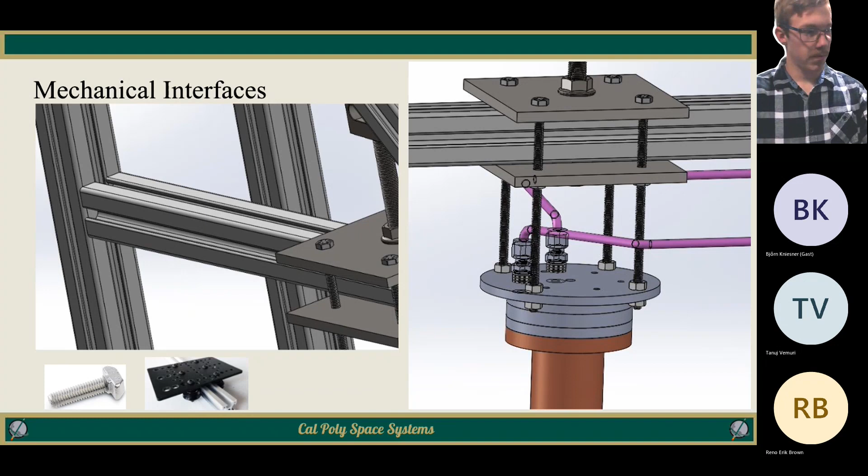So we did some FEA on this design. It's minimized - there's elements taken out that don't actually add to the structural integrity of the stand. What we did is generate a pretty fine mesh in SolidWorks and distributed the force along a 1 by 1 inch area under the top plate, which is where the force is going to be distributed through the bolt itself. We applied 600 pound force to that surface. The displacement graph you see in red is at 500 times scale, and the maximum displacement was on the order of 0.0-something millimeters, and that's without the horizontal beam that's actually going to support the rocket engine.

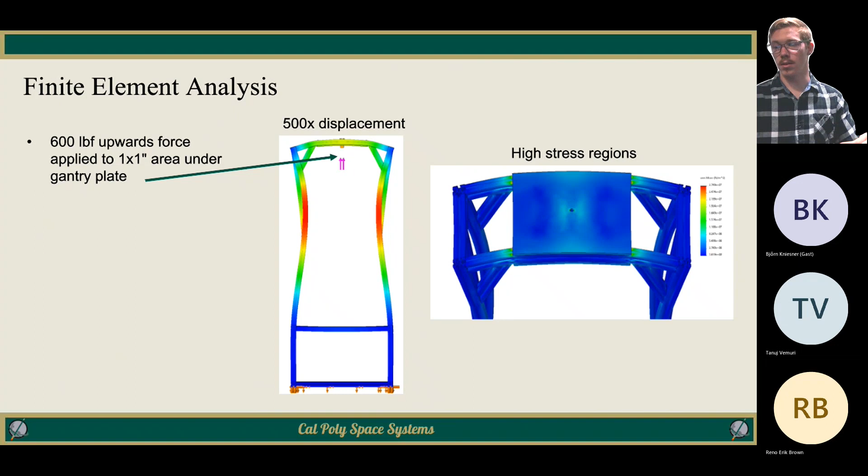We also saw the highest stress concentrated on the very outside of the plate on the top surface, and also in the middle extrusion piece underneath the plate. But these areas shouldn't be especially concerning - that middle extrusion piece isn't entirely concerning that it has a high load, because it's going to be sandwiched between two steel plates that should handle the load without issue. On the outer sides, the load wasn't extremely high, and we'll talk about the factor of safety right here.

The minimum factor of safety we saw on any mesh elements was 2.5, which is above our goal, meaning this design can handle the 600-pound force we were looking to achieve. That minimum factor of safety was seen in the picture in the top right, at the hole drilled through the center extrusion piece where the bolt is distributing the load from the rocket engine itself. Some mesh elements in that area had a minimum factor of safety of 2.5, but almost everywhere else on the stand, the factor of safety is greater than 10.

So this is - we're very conservative. This should be able to support the loads we're looking at, at least based on this analysis. And the elements that are even close to our requirements are not areas of major concern, since the deformation of that aluminum isn't going to change the structural integrity of the stand itself.

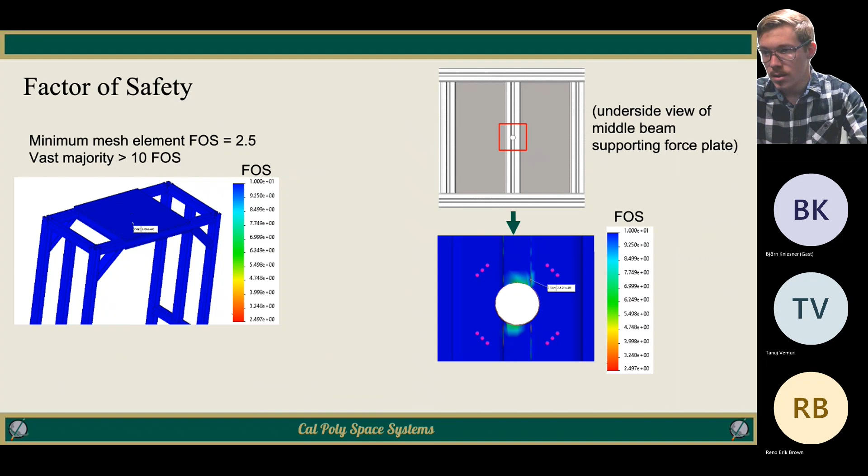So for the feed systems, our current plan is to have obviously tanks for each of the propellants. We're going to have run tanks so we can fill them up, and for each run those will be emptied as the run goes on. All the tanks are planned to be secured to the frame behind the blast shield, the blast plate, and all the plumbing routed up through and then down into the engine.

So we're coordinating with propulsions. We're currently planning on using quarter-inch stainless steel feed system lines. That's subject to change, but that's looking like the most likely solution for what we're going to use. We have a current estimate of around 45 to 51 bar for the pressures we're going to need to withstand, and that's from what Props has told us about the nitrous.

For all the routing, there's a lot of stuff Matthew covered, but it involves a lot of pressure regulators and hoses to the engine. We have burst discs for extra protection, and we'll have pressure sensors all around, monitoring different pressures in the nitrous and ethanol lines. The P&ID showed at least nine, but that's still subject to change. The tube size and valve selection is still a bit up in the air because it's based on what we can get - final numbers for mass flow needed and the final pressures from Props. But once we know that, we can start actually getting all the parts we need.

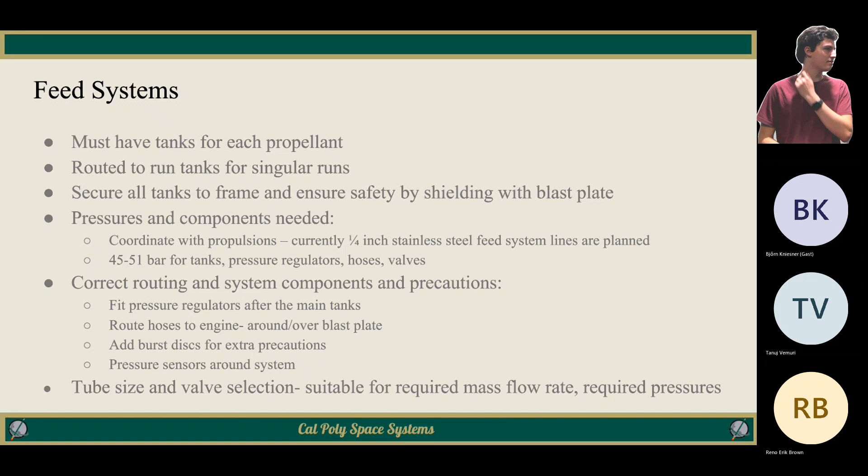Yeah, the idea would be to have the burst disc set to a higher pressure than the safety, so it would only be used in an absolute worst-case emergency. Even in an off-nominal case, it wouldn't be used unless the pressure is rising much more rapidly than expected and the safety valve relief is unsuccessful. It's meant as the absolute last resort, not intended for standard dumps.

Still subject to change as we refine and understand what we need for the feed system as we go on.

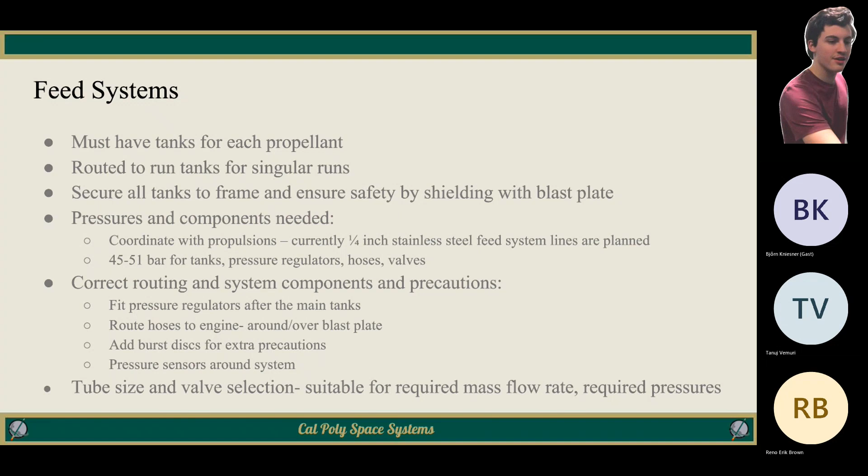So you've already seen the P&ID, Matthew talked about it to death. But what we have here, and Ryan's going to talk a little bit, is kind of an example of how we would mount the feed system to the actual test stand.

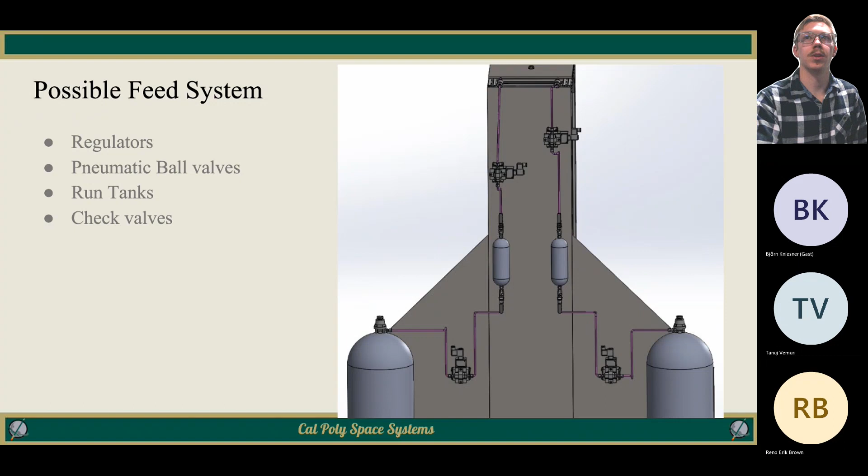Let's get another view. We have those pneumatic valves controlled by either shop air, or if we're out at a test site, maybe another tank we bring along, and this is routed up and over and dropped down into the rocket engine, hopefully in a more elegant way in the future.

Definitely consider how you're going to chain those bottles down. Obviously they need to be tied down. Is your test stand secure to the ground in any way? Yeah, this is looking at the test stand that's in the props lab right now. There's the concrete bolts, and right now on the stand they have chains wrapped around certain components of the structure, tied to those concrete bolts.

That's something I need to look into, if there's an easier or better way of doing that. But I was thinking we could mount something to any area on those legs that we could use to hook our stand to the ground and make sure it's stable and not going anywhere.

I would strongly think about your tie-down points. In perhaps an uneducated way, I'm a little concerned about tying your bottles directly to the test stand. I think they still need to be chained down, but I would almost rather have them separated from it. I wouldn't have those two things linked, because if one takes off, the entire thing's going to take off. Really think about your tie-down points on this. I have a big fear that the structure itself is going to be very flexible, especially if you're doing 600 pound-force. That's when you start to have a lot of concerns.

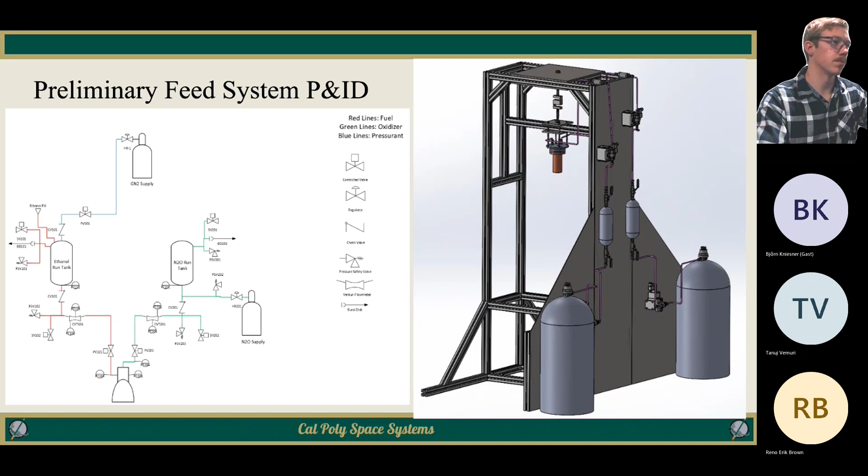So in terms of sensors, we're planning to take all of our data through LabVIEW, which is pretty standard in industry and standard in our own labs. We're going to be using multiple different sensors to gather data. The main one, obviously, is the load cell. We're going to be using an S-beam load cell.

We hope to get one from like Omega or Futek. But we also plan to have this load cell be swappable for larger loads. So the load cells we want to use right now would have a max force of 100 pounds, but we would be able to swap them out for max 1,000 pounds or lower, whatever we're able to get our hands on. Because as I was doing research for finding load cells, there's not a whole lot of places that have it in stock, still kind of reeling from the supply chain issues of COVID and all that.

So our supplies are limited, our options are limited, and so we might just have to use what we can get our hands on, because there were lead times of anywhere between 4 and 10 weeks to get your hands on a load cell, which for the tight time schedule we want to be testing and firing our engine in spring, having a 10-week lead time on a load cell plus however long it actually ends up getting here is just not reasonable.

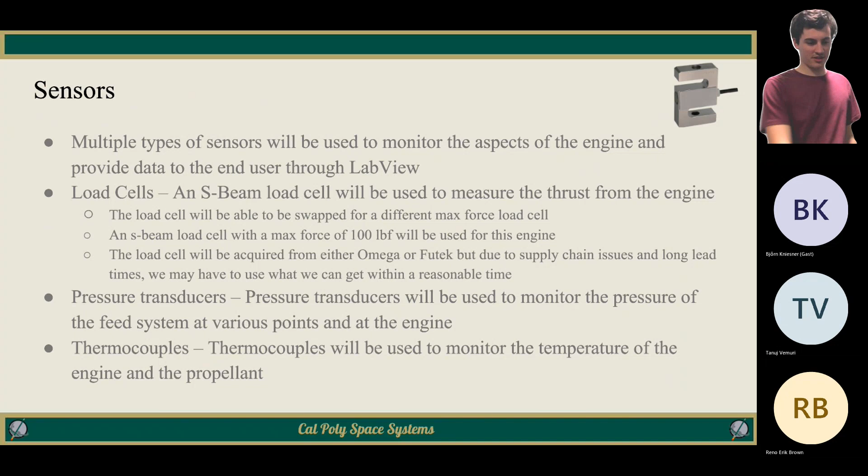And then we're also planning on having thermocouples in a few different places. We are hoping to monitor potentially engine temperature, and then, as Chris mentioned, it'd probably be pertinent to monitor the temperature of the nitrous tank as well. So we want to have the capability of having at least a couple thermocouples provide data back to the users.

So we'll be having all the sensors input through the DAC and then outputting to a computer that we are in talks with Deturis about getting specifically for us that will be used in the prop lab. And that will have LabVIEW running on it, where it will actually take all of our data and compile it to give to whoever wants to use it, probably props, I'd imagine.

So we also want to make sure, again talking about the modularity and availability issues, we want all the sensors to be able to be swapped out if necessary, because since we are planning on having this test stand be capable of supporting up to 600-pound plus engines, the sensors and load cells that we use for the lower powered engines we're building right now won't work for larger engines. So if we want this test stand to last a long time and be usable for future projects, then having those be swapped out is ideal.

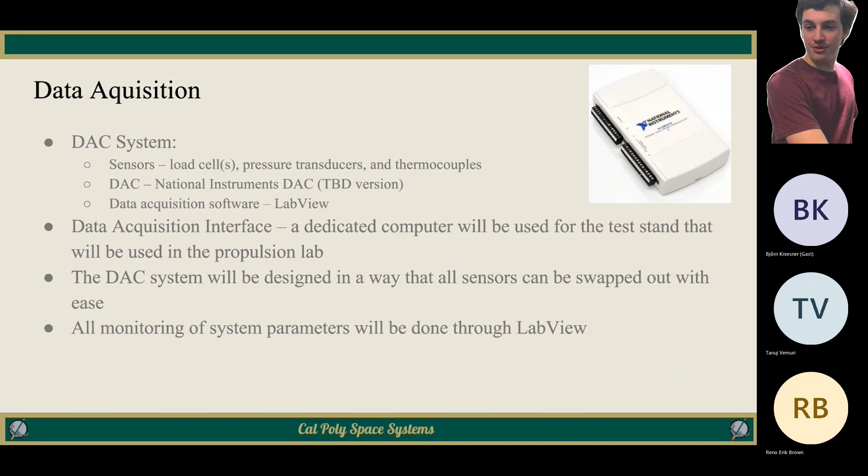And then safety. Again, because the department is quite concerned about just working with bi-prop engines, we wanted to focus on safety a lot, because we don't want anybody to get injured. We want to try and have as safe of a run as possible.

And the more things we can do to the test stand to make the environment safer, the more likely we can hopefully do future tests and develop more engines and newer products. So we'll be having a blast plate, which is where all of our plumbing is to be mounted, to protect the run tanks and all of that in case of a catastrophic failure from the engine itself.

We're planning on having a flame diverter to try and get all the exhaust gases out. So if it's mounted in the props lab, we'll have the flame diverter pointing such that all that gets blown out of the open doors and then into the air, so that if there are potential issues, they don't pool up inside the lab itself.

Then relief valves and burst discs we talked about already. In case of overpressurization, we can dump the system very quickly. But if for some reason those relief valves don't work, we'll have those burst discs as an absolute last resort.

And then we'll be drafting up rules, procedures, regulations, and have safety data sheets on hand for nitrous, ethanol, and other potential propellants that we might use. And we'll have very clearly defined rules and call outs for different stages in the testing process.